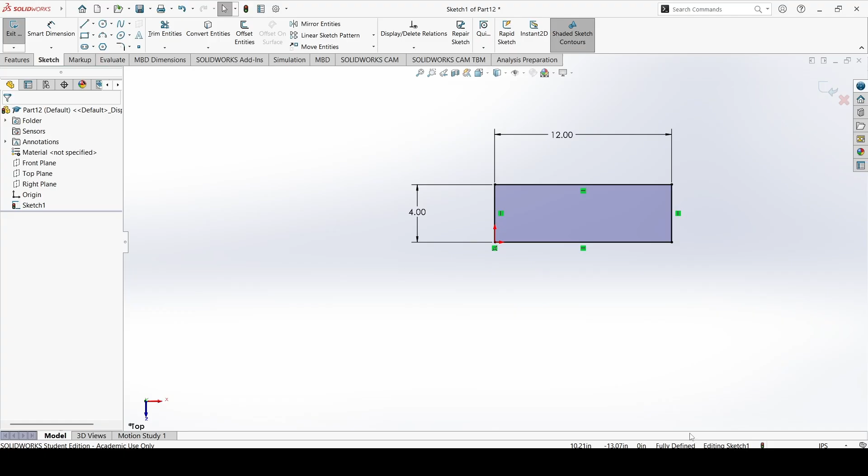And usually we don't want that. And see, it's underdefined, because you can just drag this wherever you'd like. Well, we would like it 4 inches deep, 12 inches wide. And to dimension things, you only have to click the Smart Dimension. There are different dimensioning tools here, if Smart Dimension isn't quite smart enough to select the right dimension for you, and we'll probably go over those in a little bit. So now that we have that, our sketch is fully defined, and now we can select Exit.

So we're still kind of looking down, and we can rotate by holding down the middle button of our mouse and just dragging it, the scroll wheel button. And to make this into a solid piece, well, we just select Extruded Boss/Base. I usually just call it the Extrude feature. And let's say I want this 1/2 inch thick, just like that.

A setting from when I was messing around with it earlier, there's different settings here. Blind, up to vertex, up to surface, and the rest of these. Usually you select blind. Up to vertex means you just select something and it goes up to that. Same with surface and offset from surface. Up to body, you select a body, but usually you normally just do blind. We have the check mark on that. And now we have this flat piece.

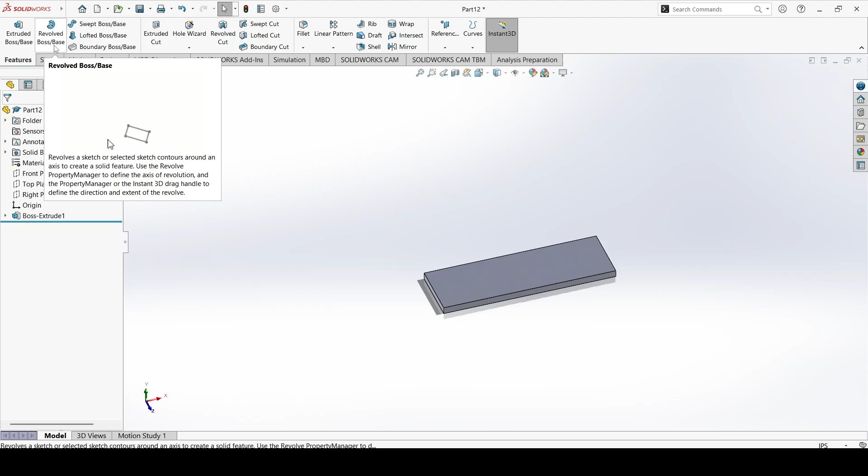Now, I'm envisioning this shelf. It has braces. It's going to have two braces because what it's going to be holding is pretty heavy. And to get these braces at about, oops, sorry, here and here, well, we need to drill those holes. And to drill those holes, essentially, we're going to want to go to Hole Wizard. And now, granted, you can go to Sketch, sketch out some points here, and I'm actually going to do that. It's very helpful to do this. You could always draw the holes with a circle, but usually I use Hole Wizard because there's a lot of options. So we're just going to select Sketch.

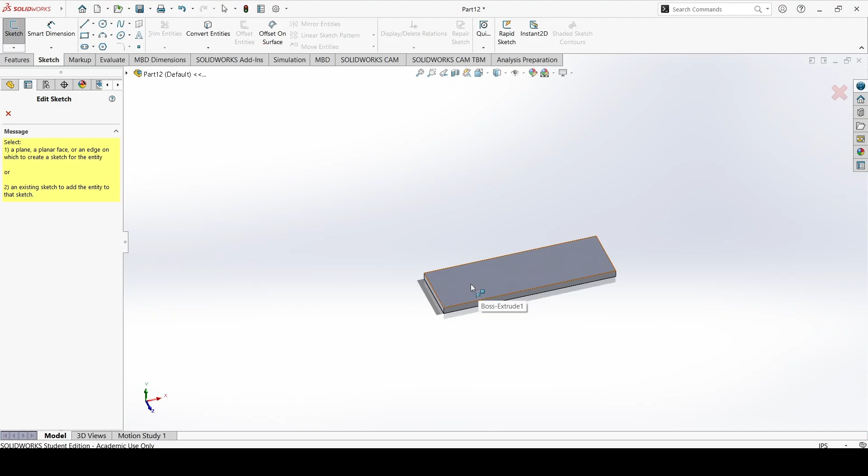We're going to go here, and keep in mind that there's also going to be a back piece here that's mounted on the bottom that's also going to be needing holes here. So we have to put our holes on this shelf here accordingly. And what you want to do is create points. And I think that these points are very useful, especially when you're using the Hole Wizard. So you can just select points on this surface and see how they're only on this surface. That's what you'd like. And say you're me and you've rotated out of your original 2D view, and say it's hard for you to understand.

You can just go up here, and there's this view orientation button, and you can just select back at the top. Now, we actually rotated. It doesn't really matter too much which side we make these offset to, where the other board goes. But in any case, we select our Smart Dimension tool, and I want these to be 1.75 inches away from each other. And we can also do the same over here.

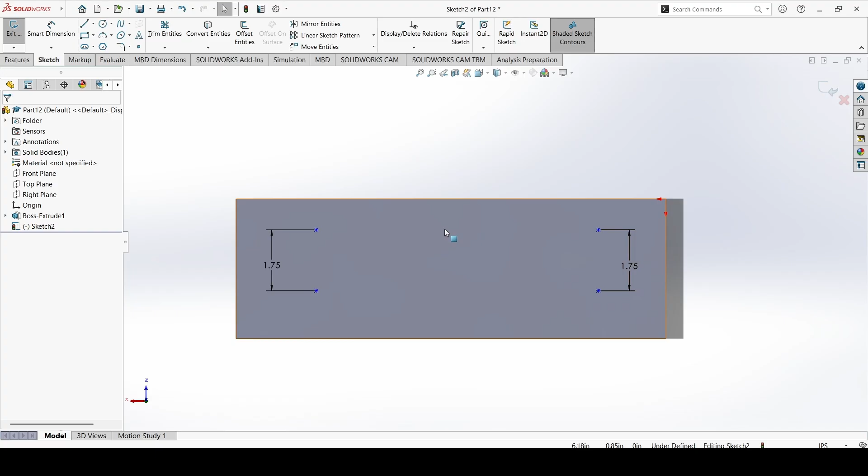With that being said, they also need to be known how far apart they are. And we actually don't need to know that because we can select on this edge over here and say I want them 2.25 inches away from the corner. Notice how these are still blue and it says undefined. That's okay because what that means is I can move this anywhere like this and I should be able to rotate that. And that is something we do not want.

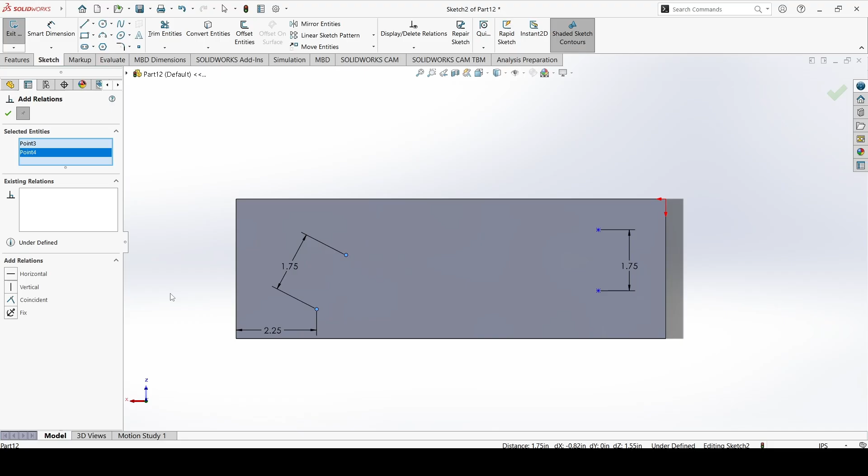To prevent that from occurring, we can go up in this top area, click on the down arrow of display/delete relations and add a relation. And it can relate to entities essentially. So after you select the 2 points, I want them to be vertical. So now as you can see, these things are always going to be vertical. So I can move it up and down, but I can't rotate it anymore.

And that's okay. Now, I'm going to say that the other board is going to be on this back side, the bottom side here. Well, I know that board is also going to be 1/2 inch thick, so I want to make these screw holes accordingly. 1/2 inch thick, let's just go with 1.25 inches. I'll just go 1.5. So, see how these are all black? I can try to drag it, and it doesn't move.

Now, these can still go everywhere. See how they're all rotating and they're just doing a lot. What I want to do is I can add relations from here to here. I can make them horizontal. See, but this one can still rotate. So I can also add relation, these two, vertical. So now they're only allowed to move left to right.

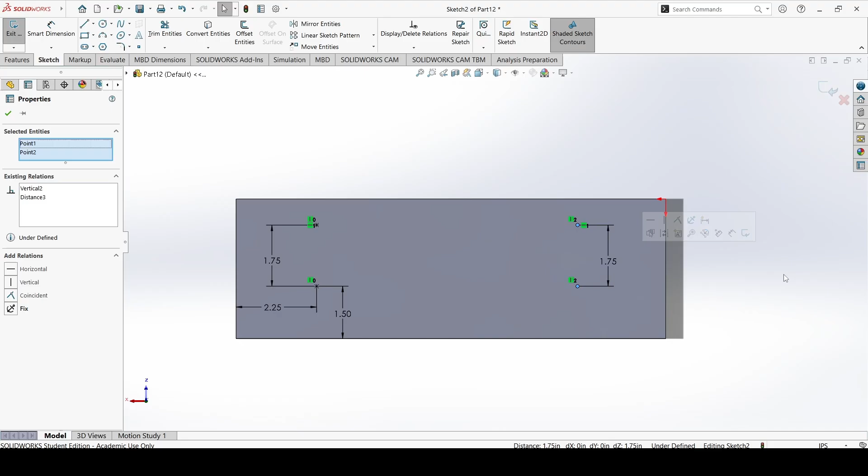And so from here, we know how much this dimension is. We can go here to here. We can actually go like this. It has a pop-up, and if we want, we can just select that dimension there, and there we go. So right now, all we've done is made 4 points. We will make two more, or maybe three, for this back side for holes we drill there.

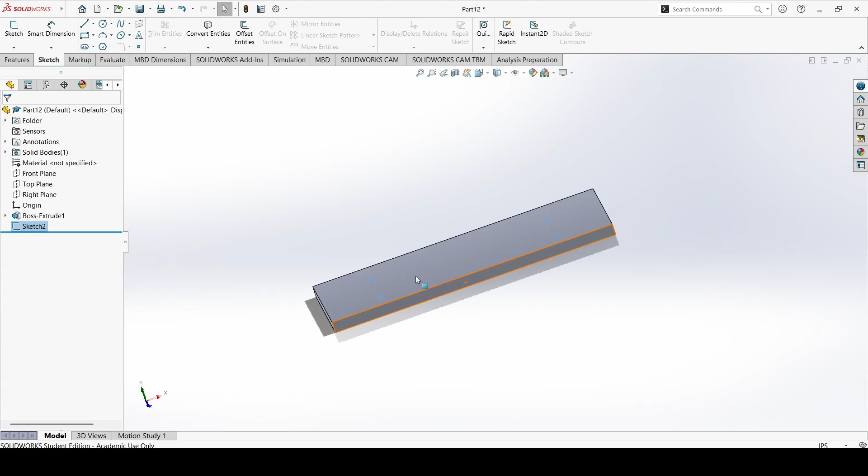But I want to exit, and now that we have these points on our shelf, we need to add the holes. So we select the hole wizard, and I want these to be countersunk screws. There's a lot of different hole types. There's counterbore, countersink, and there's just hole. There's also the tap.

Counterbore, that essentially is where the head of the bolt is a rectangle, like this. When you view it from the side, it's a rectangle, and that means it's just like a full bolt head. You can also countersink screws. You can even just straight holes. And obviously this one is going to be countersink, just because I want to. And 3/8 is going to be a little large. I'm actually going to put 1/4 inch screws in there.

And we go over here and we can select positions. Now, you can 3D sketch, not a big deal, or you can select the face that they're on. And I know the face that these holes are going to be on is this top one. So we select that. And remember those points we made earlier? It makes it incredibly easy to just select the points. And our sketch is fully defined because it knows where those holes are.

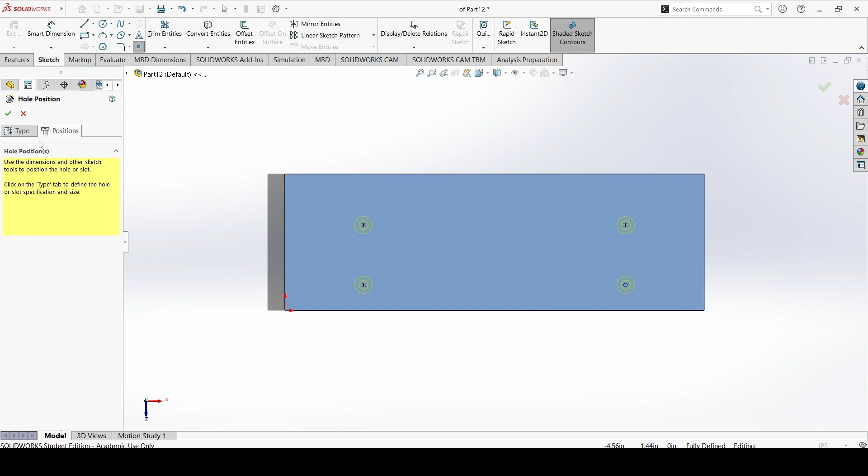So we go back and we can kind of rotate around it real quick. And we see that these 1/4 inch screws, they're there. And there's a taper here. You can't really see the taper besides from the top view. But there it is. Those are our 4 holes. We hit the check mark, and there are our holes. Perfect.

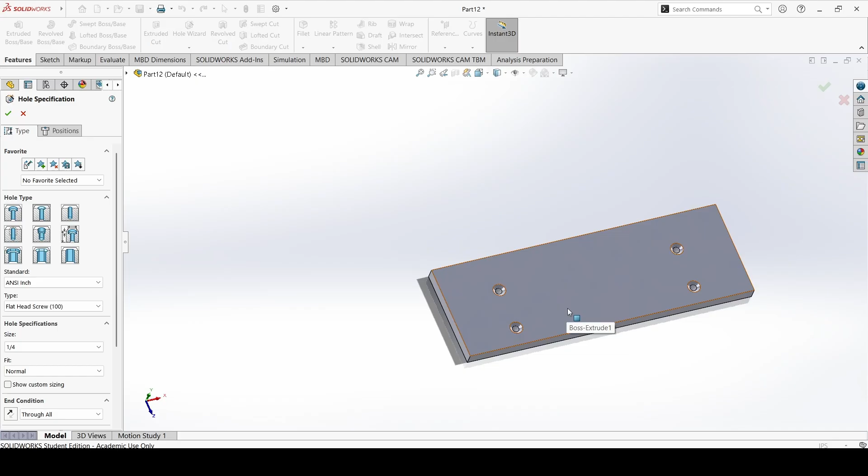We're going to do the same thing for this back row. And once again, we can just select the sketch, but instead this time I'm going to show how you can do it just on the hole wizard. I find creating a whole other sketch and adding points is much easier, but it's up to personal preference. So we're going to select the surface, and now I'm just going to put three of them back here.

Now, see how it says underdefined? These are defined, but these aren't. I would like this to be 0. Well, 0.25 because the board's going to be half an inch thick. And as you can see, this top little bit here, it's not doing too hot. See, it kind of clips outside, and that's not something we want. So I'm going to continue dimensioning these, but we're going to change the size of the bolt or the screw.

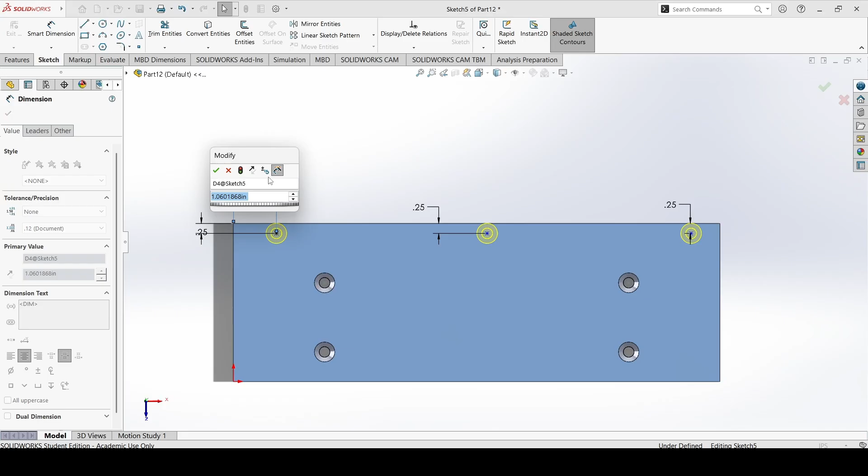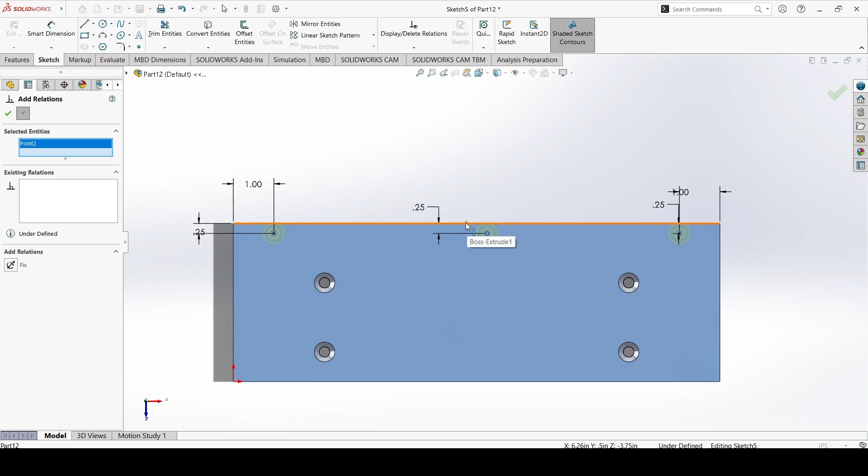Notice how I could have made all of these with a relation straight across, but I didn't. I'm going to select that and I want it to be an inch away. Same with this thing, 1 inch, and this one. This one's interesting because usually you'd want it in the middle, so I'm going to select this point and add a relation from this, usually with another point you'd be able to select the midpoint there, but unfortunately I'm unable.

So what you could do is add a center line, and a center line means it's going to be dashed. If you look really close, there's little dashes. I'm just going to make this line from here to here, not a big deal. Notice how this thing can still move left to right. Now I can add a relation to this, add relation, vertical. Now we have a fully defined sketch along with all of our holes.

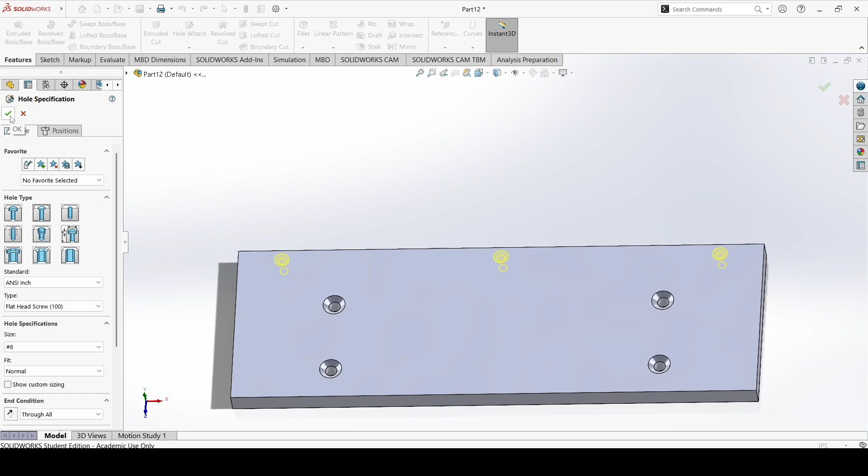Like we said before, I would like to change that type of bolt or screw, and all we have to do is go back and select a different size. Unfortunately it appears the lowest standard size is a quarter inch, but we can just select a smaller size. There's different types of fits, say I just used a size 8. That's just the size - you can order screws from McMaster Carr in any different size, but that's not the point. The point is you can select any screw size, and at least for this project, you can.

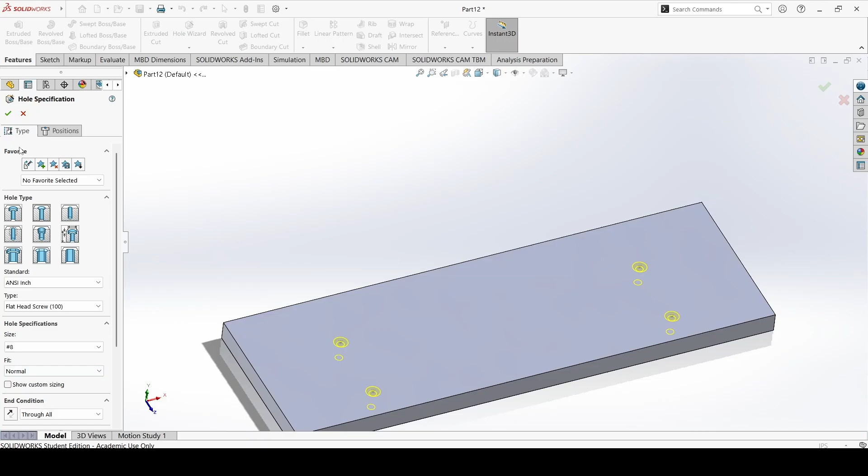So now that we have that, let's change the other ones to size 8 as well. How I did that is you select the feature they're on, right click it, and as you can see, you can edit the feature. We just want size 8, check. And there is our entire piece made.

Now our material is not specified, and just to specify a material, we can go to edit material. SolidWorks has a lot of different materials built in, and you can make your own custom materials as well. This specific piece, I would like to make it out of plastic per se, and ABS or ABS PC. ABS PC seems a little bit stronger.

You can make it out of nylon and all this other different stuff. Usually most of our parts on the Baja team are made out of metal, but let's use ABS PC. There's all these different properties on here, and usually you'd like most of them filled out. Compressive and yield strength might hold - they might have a little bit more difficulties later on, but we're going to find out once we finally get to putting it all together.

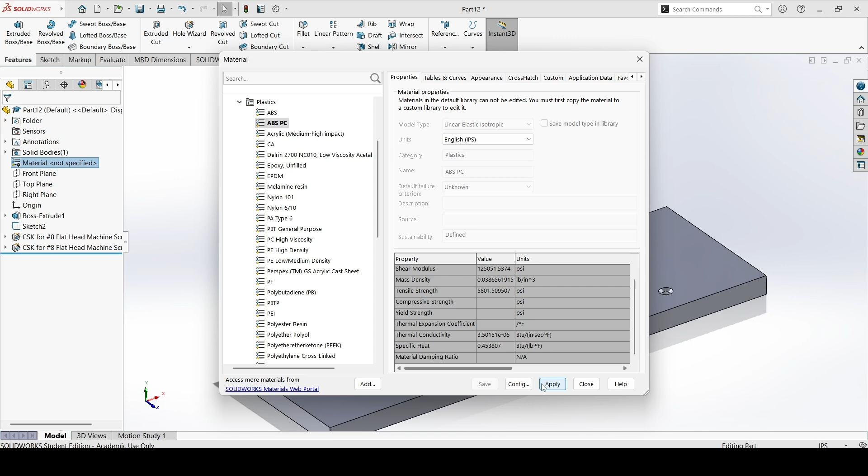So we're going to click apply, close. As you can see, now our piece is a little bit transparent, and that's okay because you just change it right back.

So now what we need to do is save our part. We hit save, and I already have a folder, full project walkthrough of the shelf, and we're just going to label this shelf top. There is a specific naming system that each year kind of has - pay attention to that as you're naming your parts. I'm just doing shelf top, so it's easy for me to remember, and it's not on the file server. We're going to hit save.

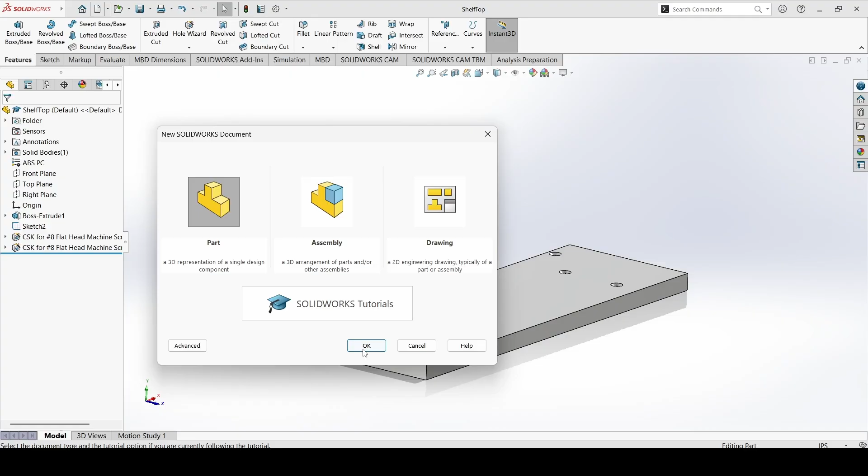Now that we have this, there's a few more parts we need to make, but we're going to leave this open. We can select, once again, up here in the top left, New, Part, hit OK. We have a new part. Now, once again, we can start with a sketch. Last time we selected the top plane, and we can do the same thing, or we can make it easier on ourselves and hit the front plane.

Now, this backing of the shelf is what gets mounted to the wall. So once again, we're going to select our corner rectangle - this goes on the back of it. And we can select Smart Dimension, and we want it to be the same width, so we'll go 12 inches. For height, notice how there was - I'm going to make this kind of like a rectangular prism, but two of the sides are the same.

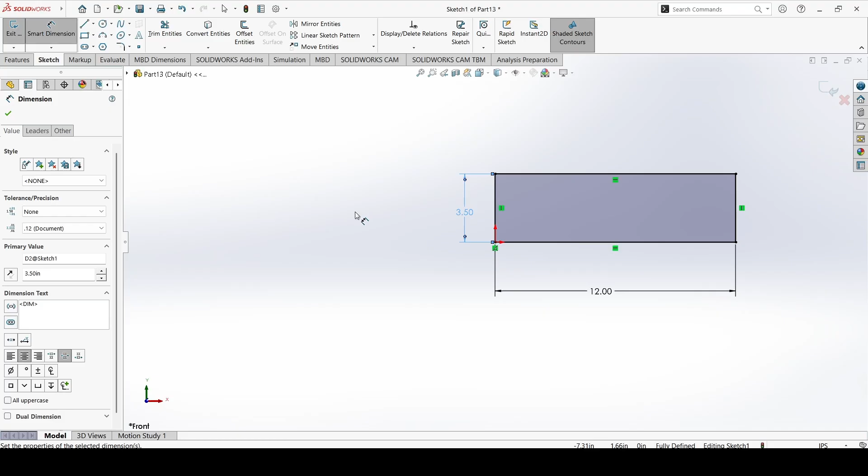So we know that the other one was 4 inches, minus the half an inch of board, or in this case plastic. We select enter, and it will do the math for you. You can do very complicated math, like 3.5 to the power of 2, say you need that for some reason, and it would do it. But we know it's 3.5.

We'll hit enter, and we'll go from there. We'll hit the check mark. Once again, we'll select exit, and we will extrude it once again. And this time, let's go with the same thickness, 0.5.

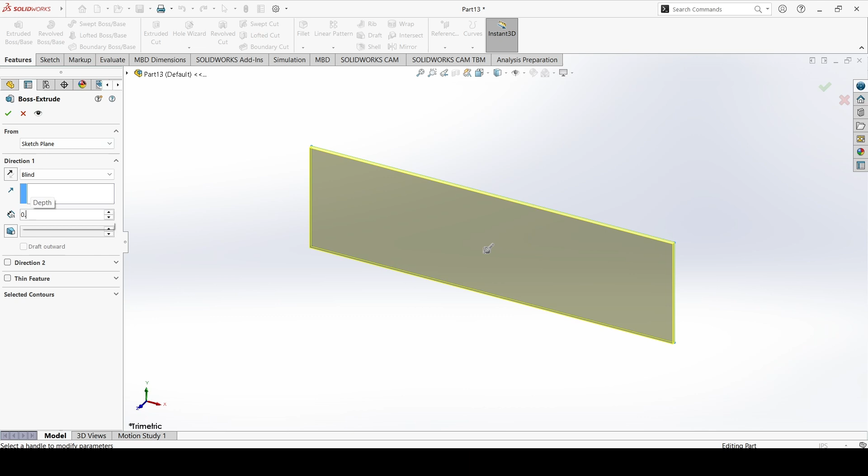All right, we have our board, and now we have two sets of holes to drill. One is going to be on this face, and the other is going to be on this face. The ones on this face, there's going to be braces here and here at our dimensions. And on this one, there's going to be the holes drilled down.

Now, what we can do is we'll go sketch, we'll go here, we'll put down 3 points. We will dimension them. We know this one was an inch away. We know this one was an inch away. And we know this one was a center line.

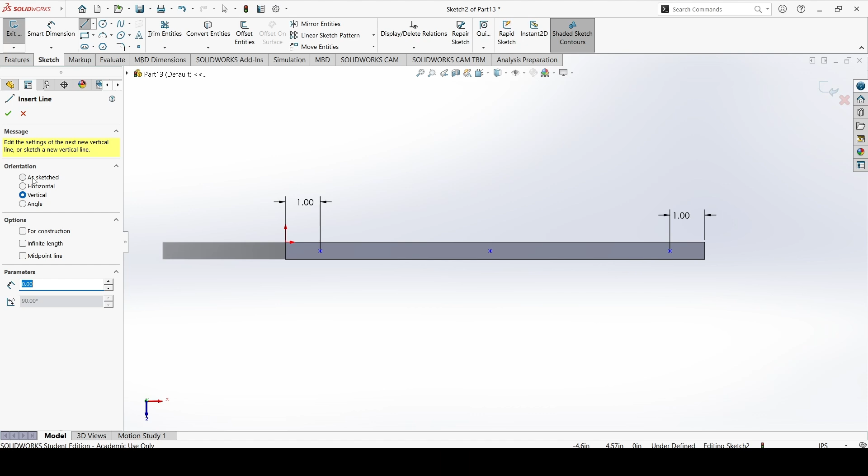And see, we can add lines, and there's a whole bunch of orientations. This one I want to be specifically vertical, but we'll do it as sketched so we can add our relation later. So we need that midpoint, which is right there. Select this, add relation, make it vertical, boom.

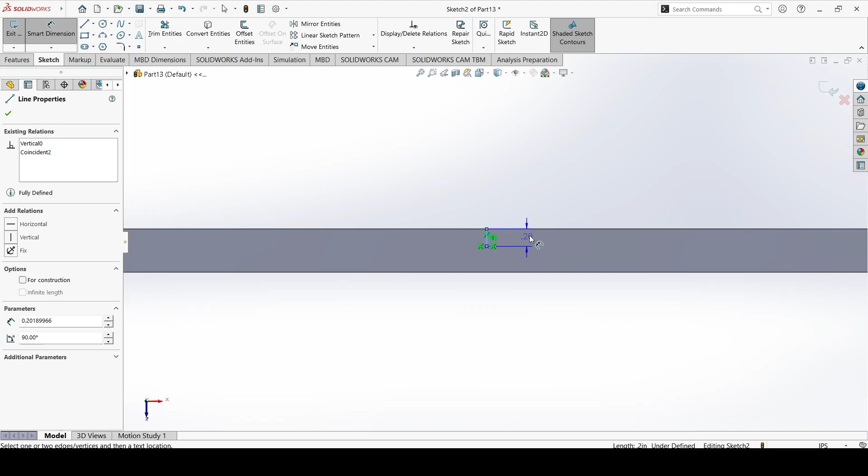And so this thing can still move up and down, so we need to dimension the length of that, which is 0.25. So that one is all black, which means it's all locked down, and these two are not.

So instead of adding dimensions to those, we can add relations, and instead of adding more dimensions, they're all related. And sometimes this is good, and sometimes this is bad. If you'd like to keep all of these in line, no matter what the distance is away, add relations.

But if you want to have them different distances, possibly, later in your design, do not. So notice how I, for some reason, exited my sketch. To get back into it, we just right-click the sketch and hit Edit Sketch. Very simple. So this one, I'll just show that it does the same thing.

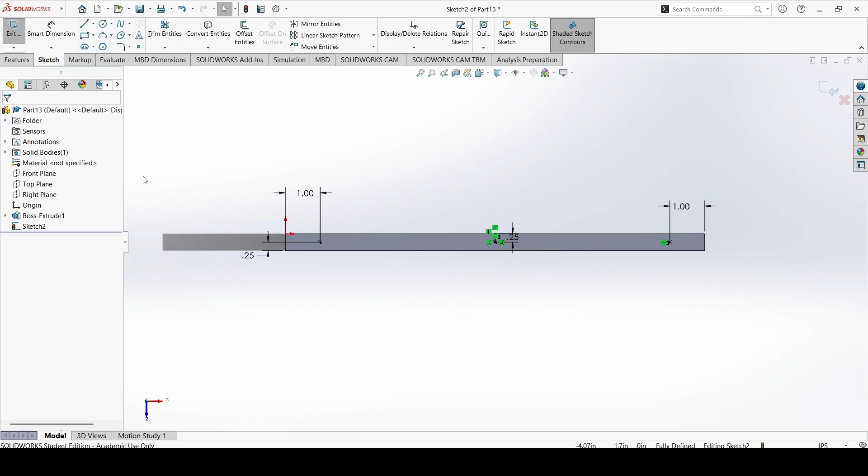Everything's black, fully defined, we're good. Now, we're going to add a feature. We're going to go to Hole Wizard. There are more options here, but Hole Wizard is the most common one. Hole Wizard, we're already on size 8.

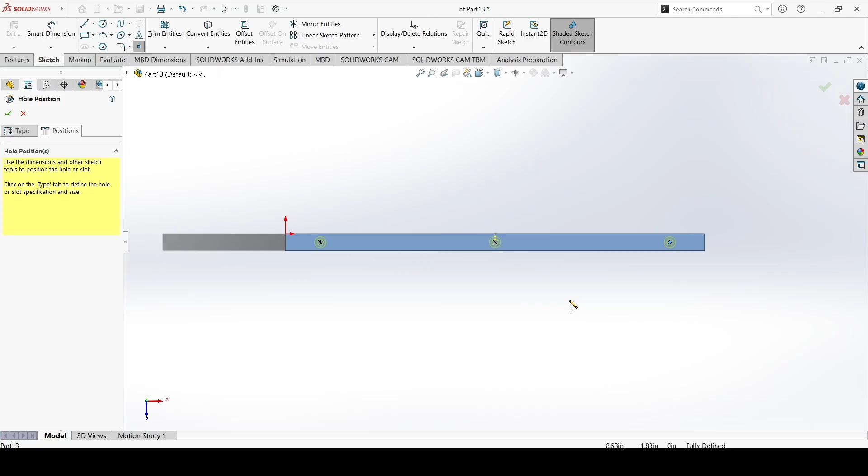We go to Positions, we select our surface, and all we got to do is do that. And notice how it went all the way through. We're going to change some of those settings. But also notice these are tapered too. You do not want that.

So what we're instead going to do is we're going to select Hole, Size 8. And look, instead of having the taper, it just has a hole. And so this is usually how holes are made. You don't have two countersinks with only one technically being used, if that makes sense.

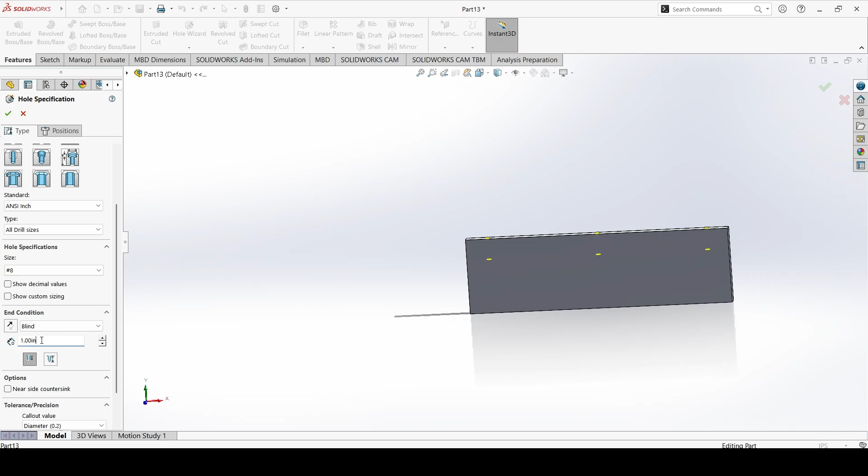So what we're going to do is we're going to select our end condition to be blind, and I want these to go an inch in. I lied, I want them to go half an inch in. So that's how that works.

Hit the check, and boom, right there. And this sketch, it kind of looks a little weird because I have that line in there. And if you don't want that to be showing, you can just select hide on that sketch and it'll be gone.

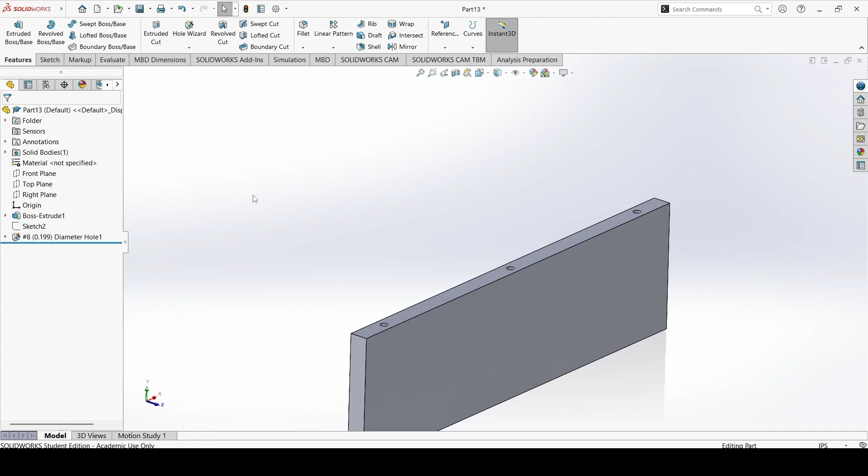Now it's time to have more. And by more, I mean we're going to create holes in this. And so I'm thinking that since this is the back, we're going to have holes all the way through it. Which means... we're not going to have, okay, we are not going to have holes all the way through it.

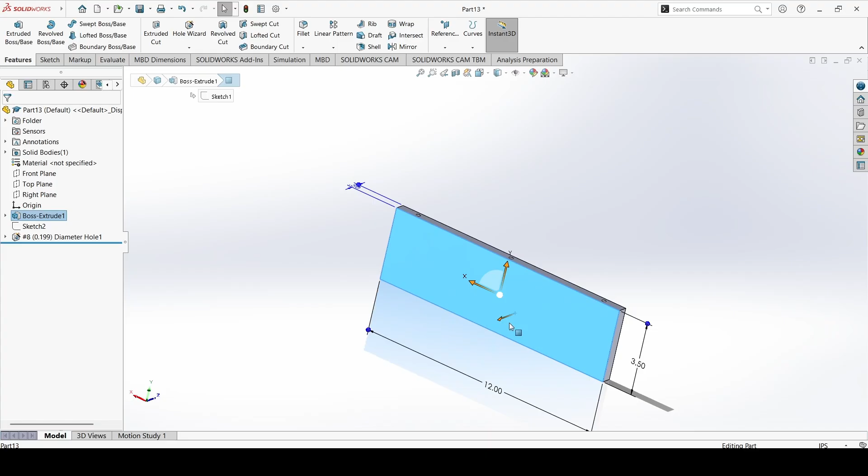Whenever we do the design or the FEA, finite element analysis, this entire back, we're going to act like it's glued to the wall. So simply what we're going to do is on this back side, we're going to be creating more countersunk screws that go this way, that go into the braces. So sketch.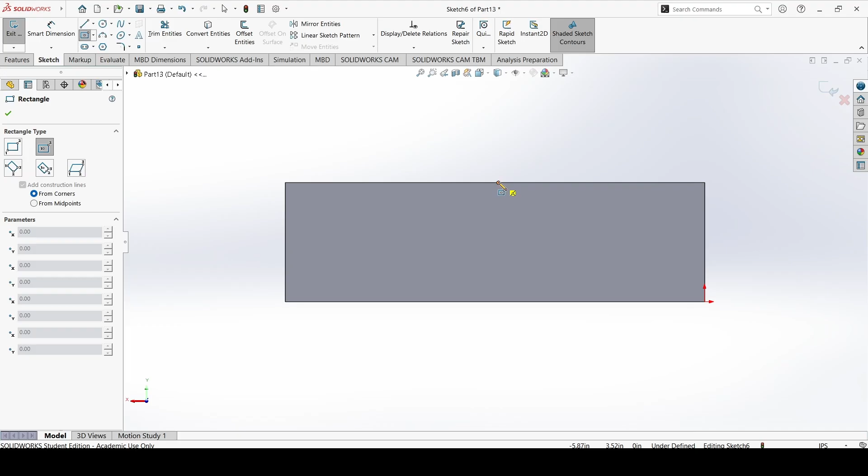This time I actually want to create a center rectangle just to show you guys the different tools. We're just going to draw it out like this. See how it reaches both edges at the same time? That means it's in the middle, but not in the middle vertically. So I'm just going to do that, and we're going to select 4 points. 1, 2, 3, 4. We just created 4 more points.

Now if we go back to our other design, we know that these - hold on, sometimes you have to go into where they're at. Oh, we made them on this one. Okay, we're just going to make it how I feel.

We can add more relations, but before that I need to create the center point here and the center point there. So add relation between this one and this one - they're always vertical. Between the center point of the rectangle and that point, add a relation - they're always horizontal.

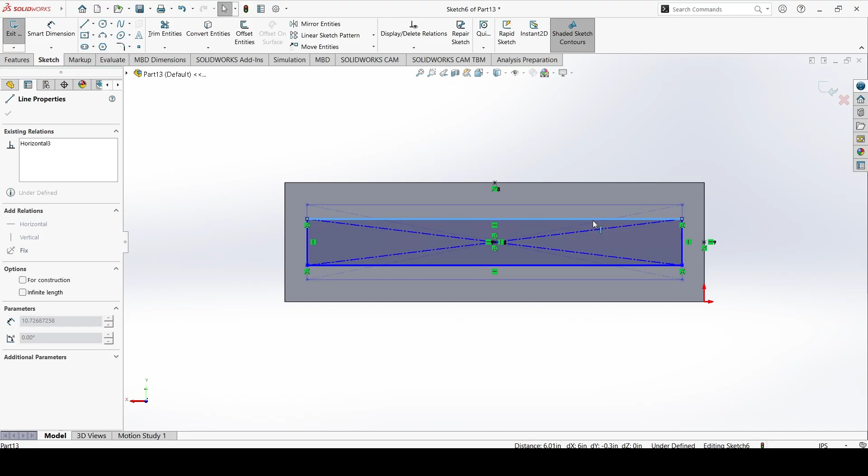That's if we want the pattern to be in the middle, and I think I will have it in the middle this time. These screws will probably be a little bit closer together, like that. We'll go 1.5. And how far across they are, let's go 10.

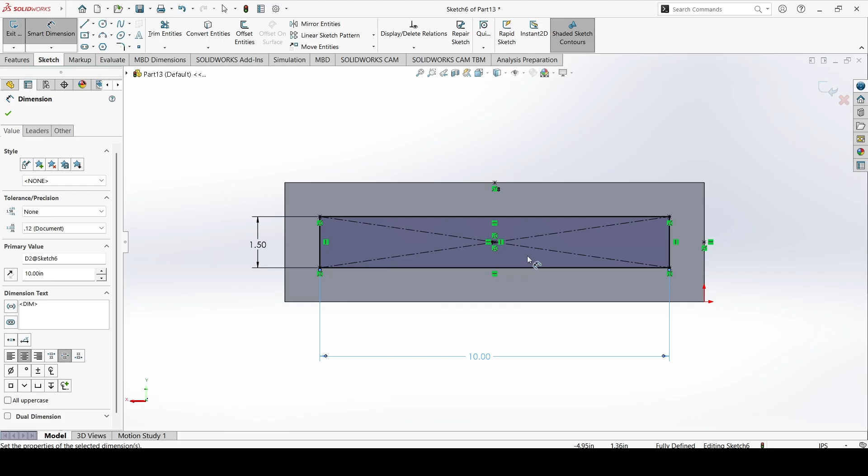So keep in mind that the board, the braces, they're going to be in the middle of this. Makes sense? These holes are going to define them. So we can just hit check, and our sketch is fully defined. This is where I want the holes.

We'll have to exit. We can go back to features, hole wizard. And this time we want countersunk screws, positions, select the surface. All we got to do is select those 4 points, hit check, and then we're good. So I'm going to hide that sketch.

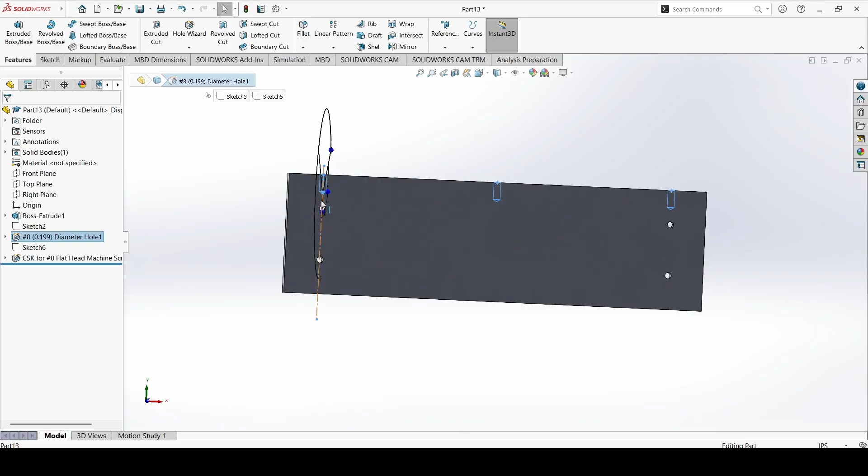So as you can see now, these two won't be an issue. At least we will find out if they're an issue, but they shouldn't be. We have our plate here.

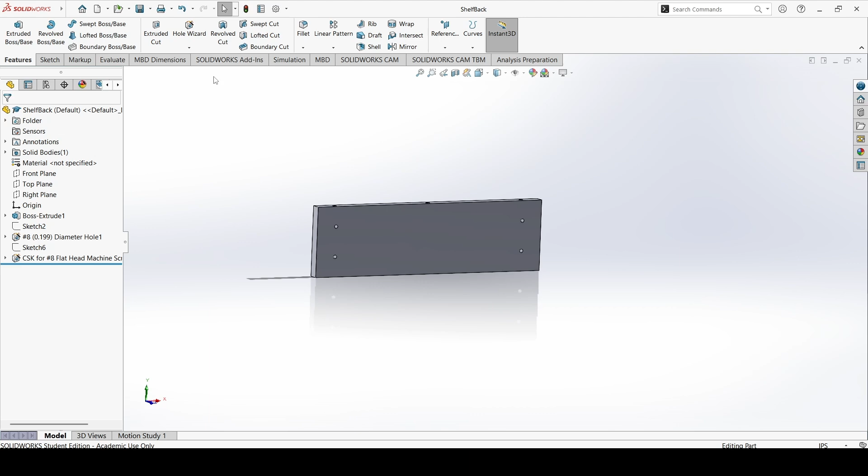Now we need to make the bracing. So once again, we're going to save this part. Instead of shelf top, we'll go shelf back, enter, and we need one new piece that we'll just duplicate twice. We're going to make an assembly and do it from there. We're going to make a sketch.

Our front plane was used for the back, our top plane was used for the top, and to stay with the same type of coordinate system, you could say I'm going to select right plane. And I'm going to make these triangular supports. One, two, three.

Now these supports are going to be fully covering - they're going to go to the ends of the board. Okay, so we know that our top board is 4 inches. We have half an inch being taken up on the bottom by the other board.

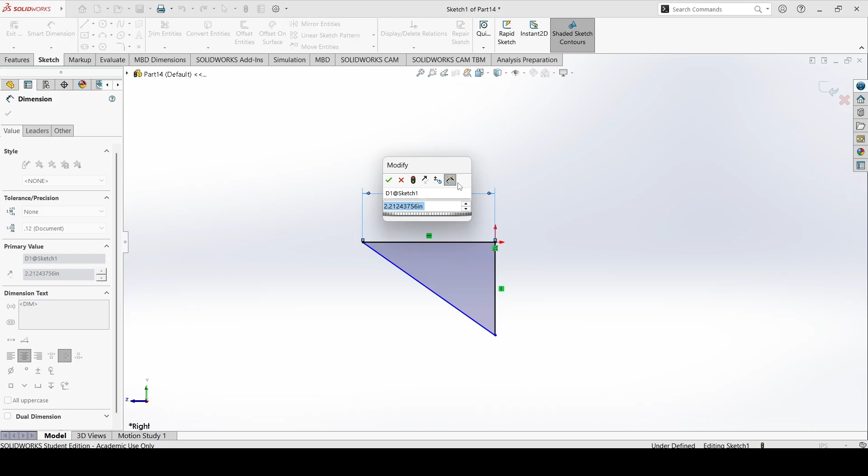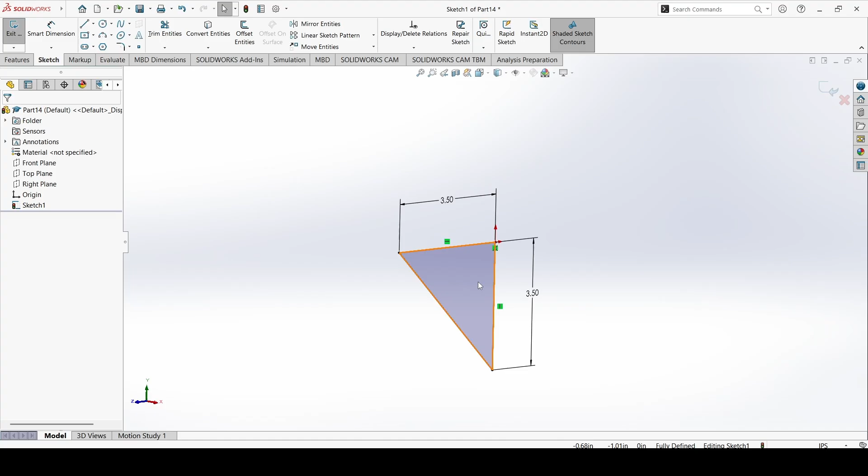So that's 3.5. On this one, we have the board that is 3.5 inches tall and not being taken up by another board, so it's another 3.5. So this sketch is fully defined. This is what our brace is going to look like on the side. Exit. On our features, we're going to extrude it, and we know we want it to be half an inch, just like everything else we've made.

Now here comes the slightly tricky part, getting the measurements on here. So we'll start with the top. I would like to show you the evaluate tool - you'll use this a lot on the Baja team. You go into evaluate, you can select measure. After you select measure, there's different units and just different distances there. Usually you leave it the same unless there's something specific.

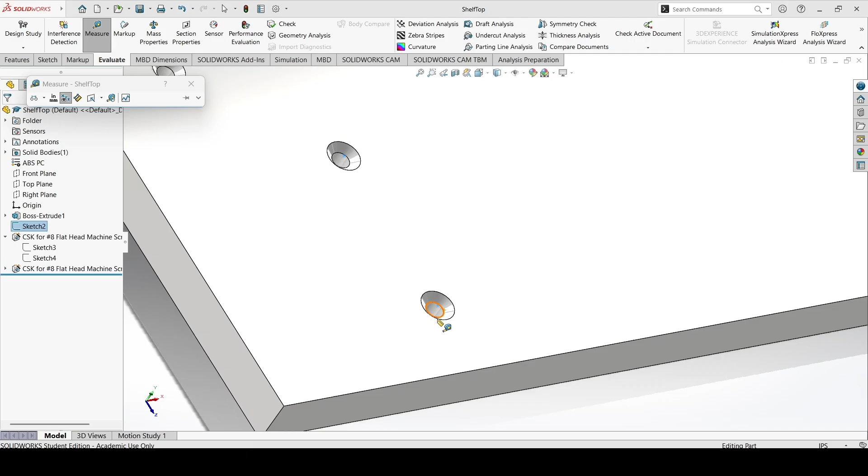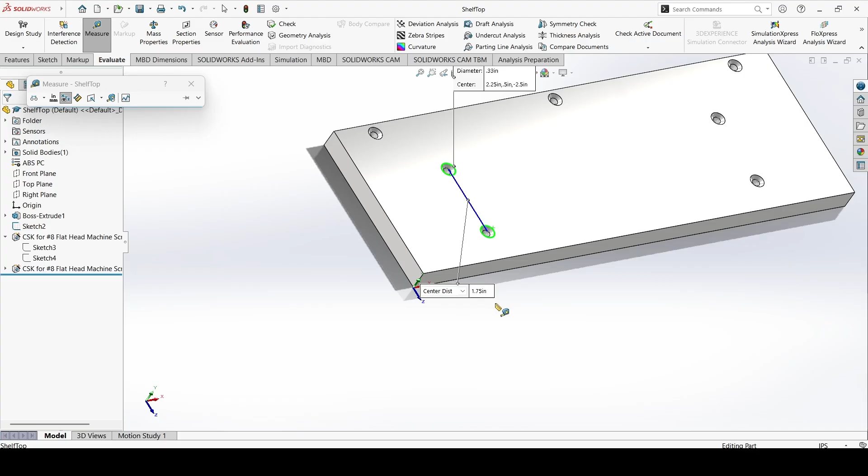But what I'd like to do is select this circle and this right there. Notice how it says center distance is 0.75 - so it means from the end, it's going to be 0.75. And then from this circle to this circle, it's 1.75. So that's good. So now hit X.

We'll go here, and so this is our top. We can go to features, hole wizard. We want just the hole, positions, select this top one. Now put 2 holes down. We know that the first hole is 3/4 of an inch away, and we know that this hole is 1.75 inches away from that as well.

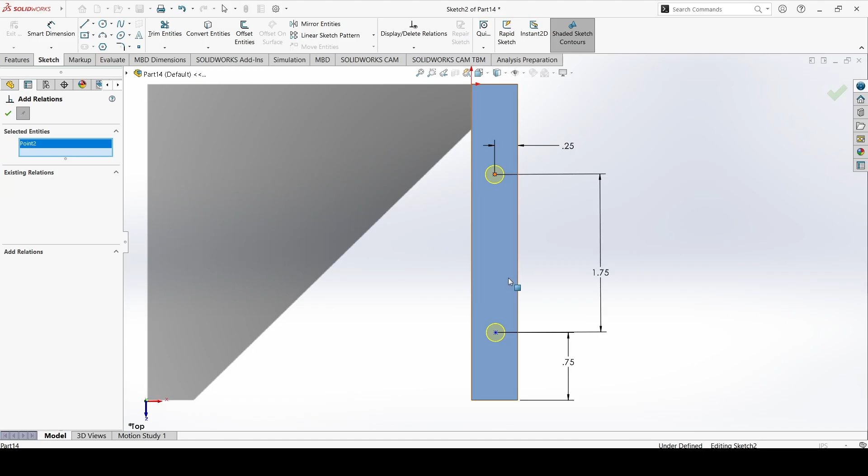So how are we going to align these with the center? Well, all we have to do is select that. From the edge, we know it's going to be halfway, 0.25. And it's not all black yet, so what we're going to do is add a relation - these two are going to be vertical with each other. Check - they don't move anymore. We can hit good, and there we're good.

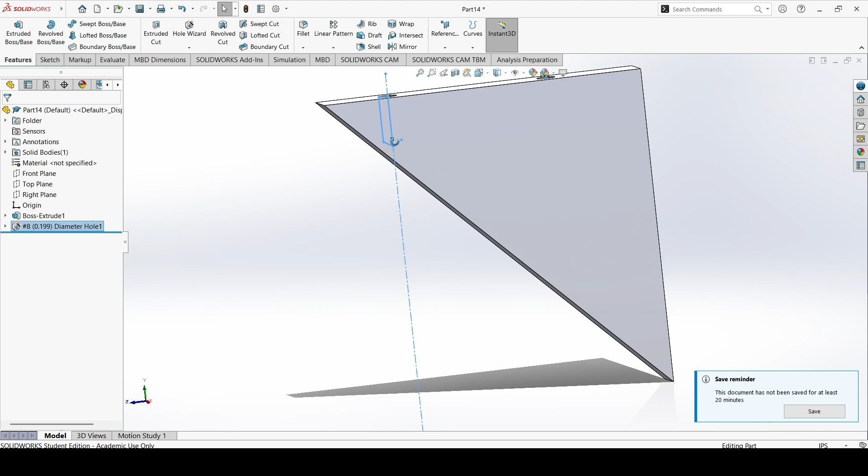So this hole goes down half an inch, and I think this should be fine for now. And we will know in the FEA because it'll tell us whether this hole is down too far or if this starts bending a little too much.

So now we need the back side, and we can do the same thing. Shelf back, go over here, evaluate, measure. From the bottom to here is an inch, and from that inch to the other hole is an inch and a half. Exit out, go here. And this time I'll just do the same thing. I won't make an entire other sketch.

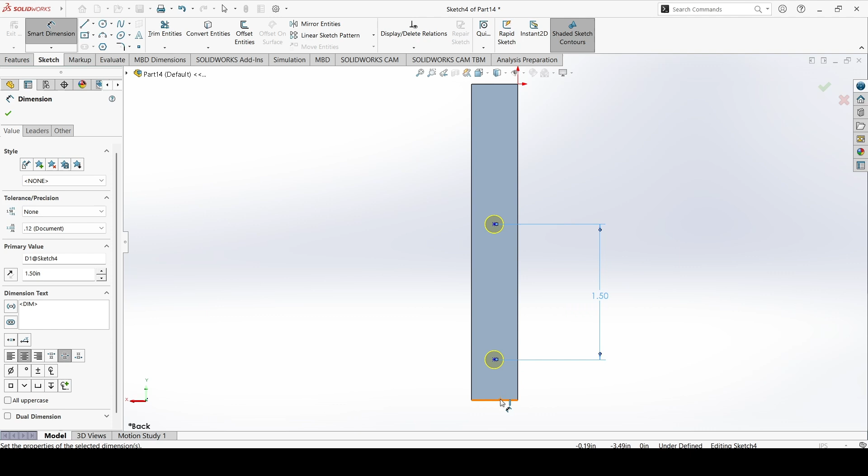Let's go straight to the hole wizard, positions, and points. One there, and one there. Remember this was an inch and a half. I believe this was an inch. That looks about right because there should be an inch on the top here. Okay. And now they need to be in the middle.

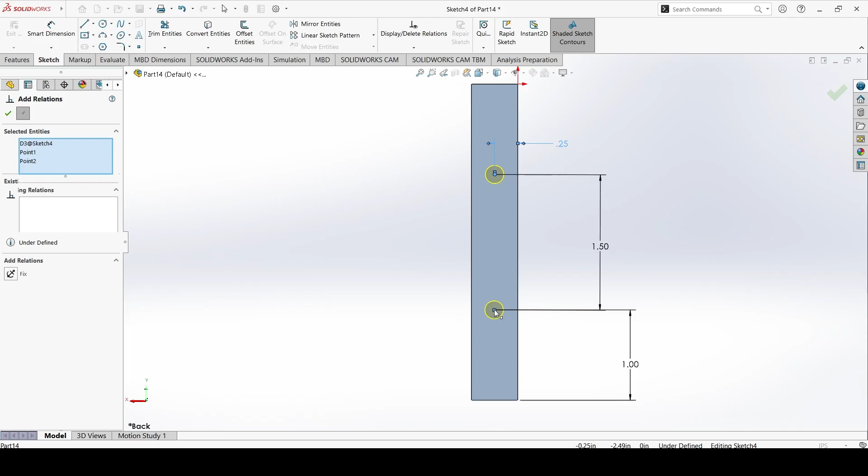So easy enough. 0.25, enter, add a relation, vertical. Fully defined, as it says in the bottom right. Hit the check mark, and there we go. This piece is now done. Once again, we can change the material. We can just edit material. And I forgot what I selected on the other one, so we can just go ahead and check that.

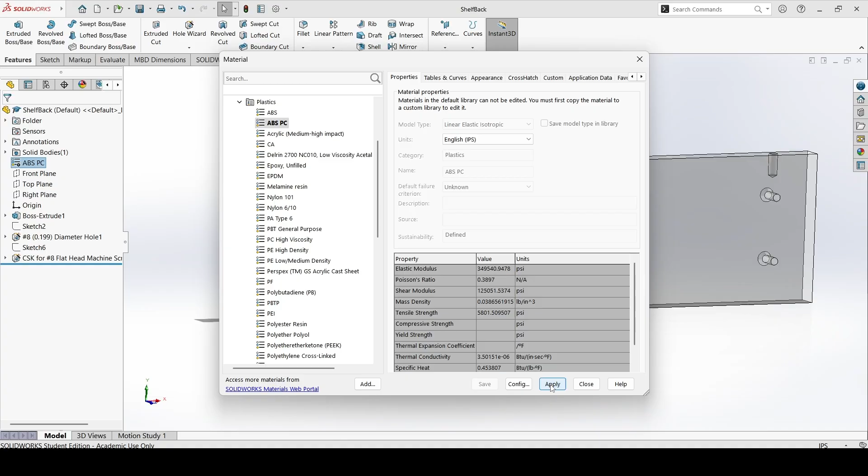And I will go ABS PC. So, did I do that on the shelf back? I did not. So I go here, edit material, plastics, ABS PC, apply. And it does make it transparent. That's okay. It doesn't technically do anything. You can always change the transparency later.

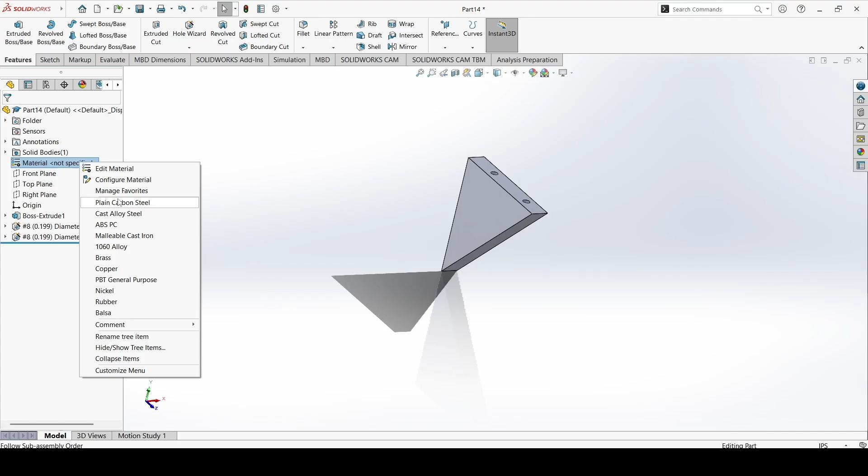And a little quicker trick is if you right click, these are your favorites. And you can change your favorites in the program itself. You select ABS PC and go from there. So now that we have that, I would like to save this part and then we'll go shelf support. Enter, and there we go.

Now it is time to assemble this all together. We're going to hit new. And since we can make assembly from part or assembly, it says I'm running low on memory. So what I'm going to do is I'm going to close out my current SolidWorks tabs, and we're just going to create an assembly separately. New, assembly, we're going to hit OK, and it pulls up our files.

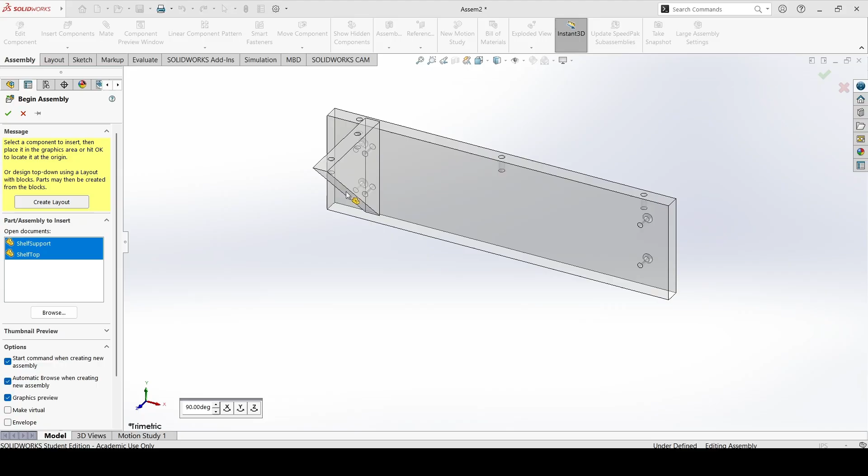So in your files, you should be able to select all of these. Hit open. In this case, I would like this piece, the backing piece, to be fixed. So if I just select that, put that out there too, and this, we should be good. So I don't want the transparency to be changed. As you can see here, if you right click on it, you can change transparency. And I want them all to be solid.

So what we can do now is this component is fixed. The first component you place is usually fixed. And that'll happen in assembly. So you'll be like, oh, this component's fixed, and you'll try to fix it with a whole bunch of mates. Sometimes you just don't even want to try. So this is fixed. That's fine. To put this all together, though, are mates.

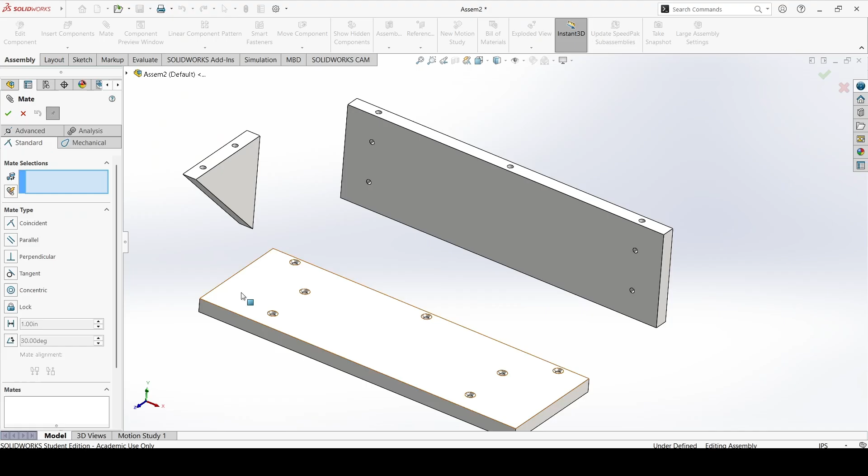You select a mate, and I'd like to put this bottom brace on first. So if I select this hole and this hole, because those two line up, they're spaced apart, but it looks like it's almost centered, and it is. So it's kind of concentric to that hole. Okay? So usually your mates are pretty self-explanatory. So if I select this and this, they're concentric. And what concentric does is it just lines up the middles of the circles.

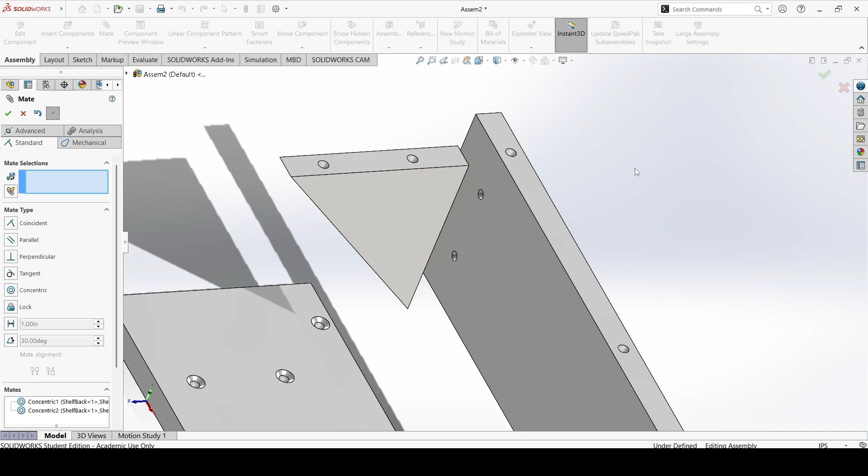But notice how I can still move it in and out. We don't want that. We know that this face would usually be pressed up against that face. And so coincident, that's what it does. It means they touch. You don't want perpendicular, or you could technically have parallel, but since you have these concentric holes, it works just like this. So you just hit the check mark. And now, if we X out of the mates, it's fully defined. This component is fully defined.

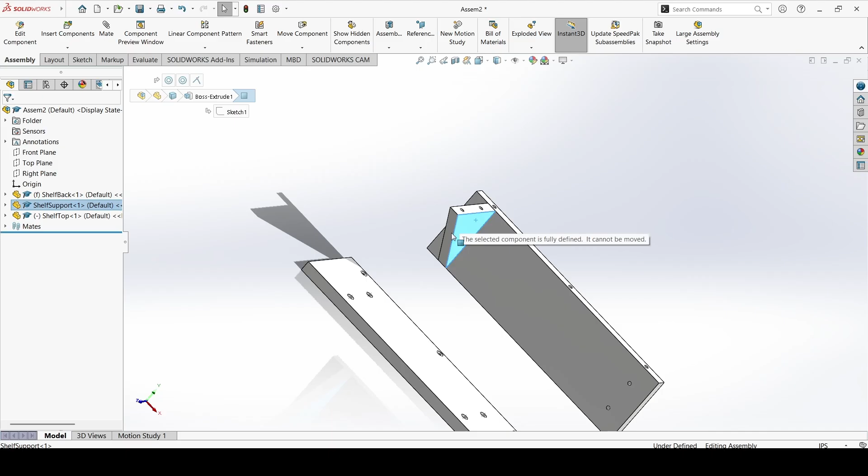Oh, it looks like we didn't make the holes right. We can go back and switch that. All right. So what I'm also going to want to do is select mate again. And we'll go at the bottom of that hole, not to that. So if we select the wrong thing, we can just select it over the mate selections, hit delete, go back over. We should be able to select a new one. Okay, sometimes it messes up. So mate, middle of that circle, middle of that circle, go for it. Just drag that up.

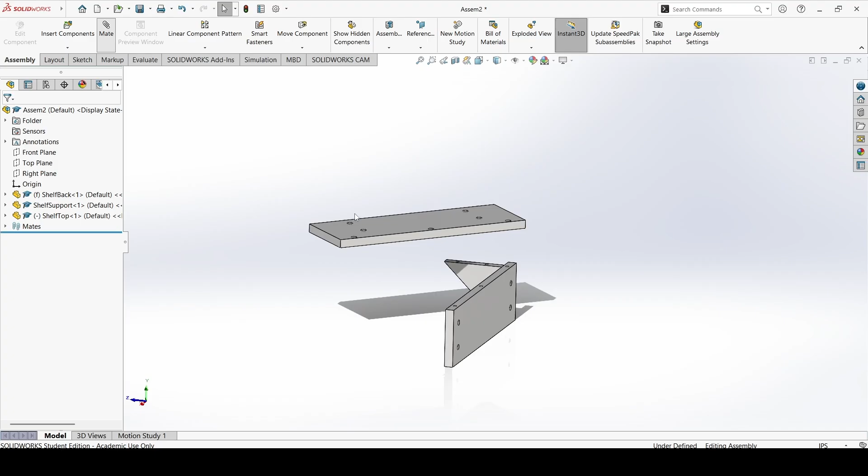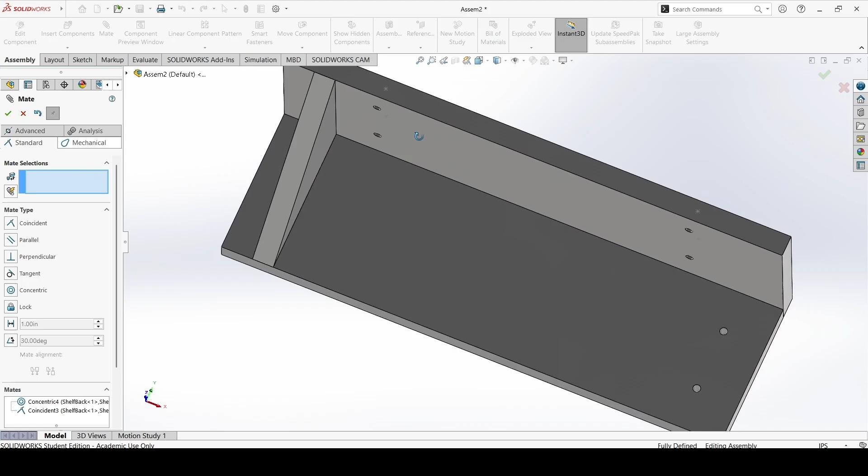And when you're doing an assembly, you're putting everything together the way you would in real life. So like that. So you'd line those two holes up, and then you'd bring this entire piece down, just like that. So as you can see, our holes aren't lined up here. And that's a little problem, isn't it? So what we're going to do is evaluate it real quick with our measure tool, and we know that those holes need to be an inch away from the edge.

Okay, so something interesting you can do in SolidWorks and many other programs actually is open part in position, and you can edit a whole bunch of things. So you can edit the part. It says we have to save it first. That's okay. We'll just put shelf assembly. I probably spelled that wrong.

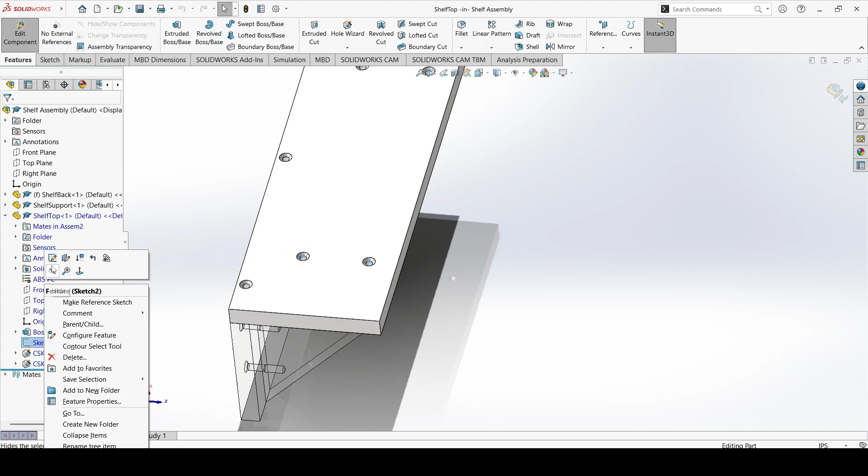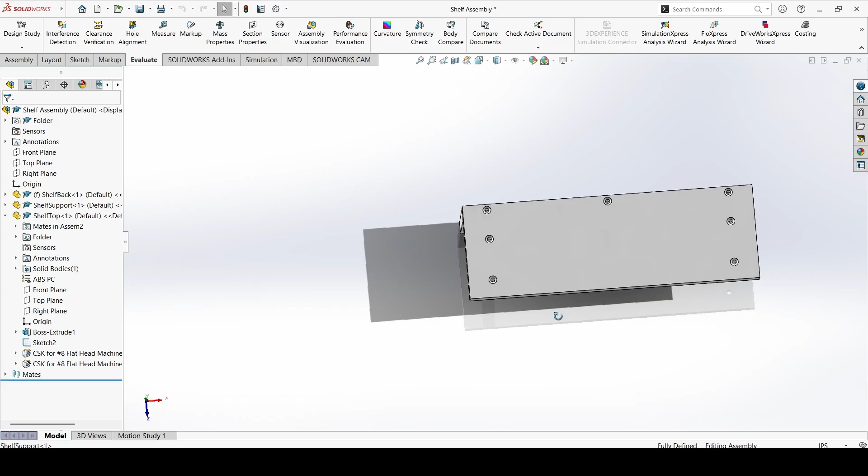What it'll do, it'll allow us to edit the component, and we want these holes to move. Well, lucky for us, we can edit our sketch, and we know this needs to be an inch away, and we know that this needs to be an inch away. Hit the check mark. We can exit sketch, and we can exit editing the component, and now everything's fine. So if you look close, that hole goes all the way through, and that's exactly what we want. And that's why I usually do sketches like that, because they're super easy to change without having to go in anything super deep. And so we need another shelf support, don't we? Because there's another one over here.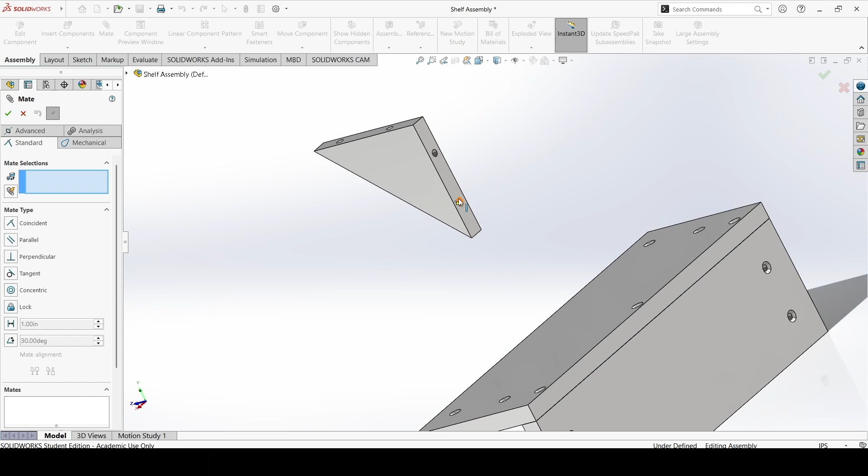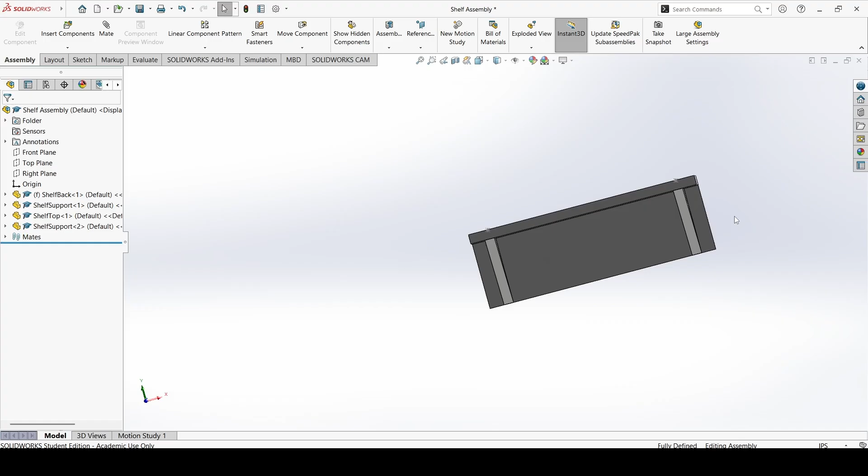So we can copy with mates, and usually I don't do this because sometimes it all gets a little bit screwy. So I'll just select a component, Control C, Control V. Pops out of thin air, of course, because that's how it works. And we'll go to mate. Once again, we'll go that to this, hit the check mark. And to make it easier on us, we'll go this to this. And that should lock us completely in. We have a fully defined assembly.

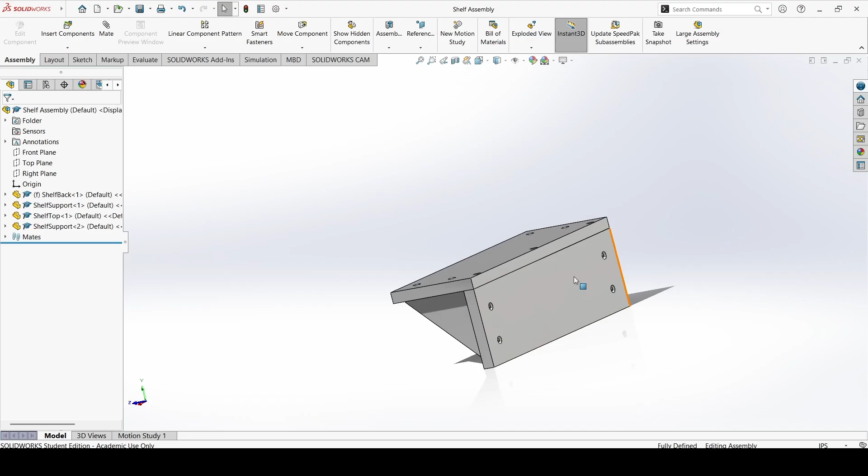This is what it looks like. Lots of screws, lots of awesomeness, and we're going to have a weight pushing down on this. And so real quick, I just want to save that. Save them all. Now that we have this, so what exactly happens here? Well, earlier I technically forgot to add a little circle in here, which is where our pressure was going to be applied. But instead, I'm just going to act like a big old foot is stepping on this whenever we evaluate. So that's how you assemble an entire assembly, essentially. So this is against the wall. We're going to act like this is just glued straight to the wall and nothing's going to move or anything like that. I could have put screw holes in here, but I'm not doing that.

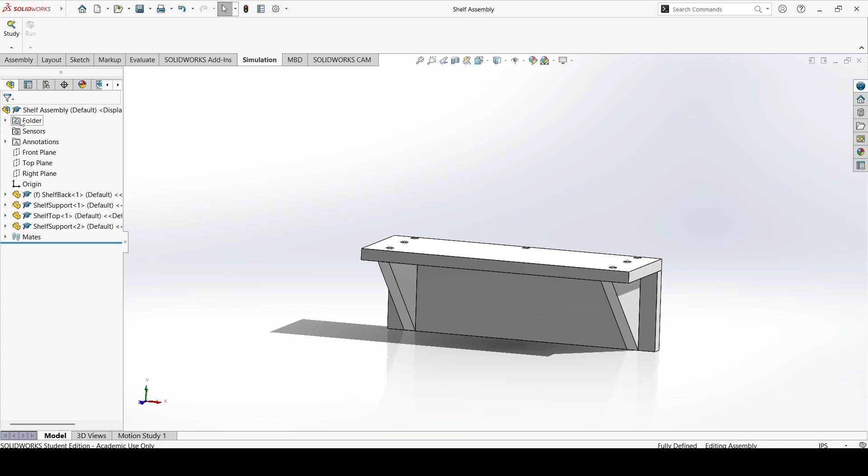To start simulating, go to the simulation tab. And we should have materials for all of these so far. We're going to select study, and it's going to open up all this fun stuff. We'll name it shelf study. And usually static is what you'll use at the beginning level. There are many different types. So right now I'm working on learning more design and topology. There's a lot of different other simulations. But for this one, let's use static. We'll hit the check mark and we'll go from there.

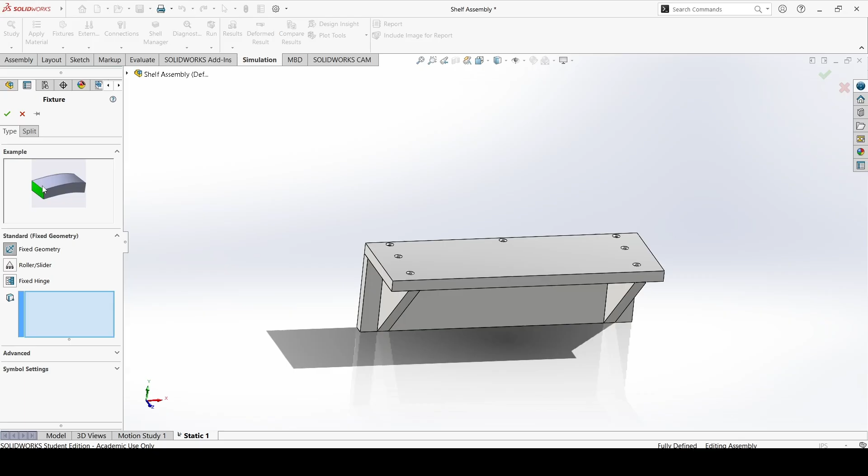So it appears that this thing has some weird transparency again. But anyways, we're going to first add a fixture. And a fixture just affixes something. And as we can see, fixed geometry. It has a little example actually, kind of like bending a beam, one end is supported, the other isn't. So in this case, this beam, this part, and we'll go with this part, is supported.

With the check mark. So those green things of awesomeness, arrows and vectors and stuff like that, those tell us that that part doesn't move. And so everything else is fully defined. Here's our external loads advisor.

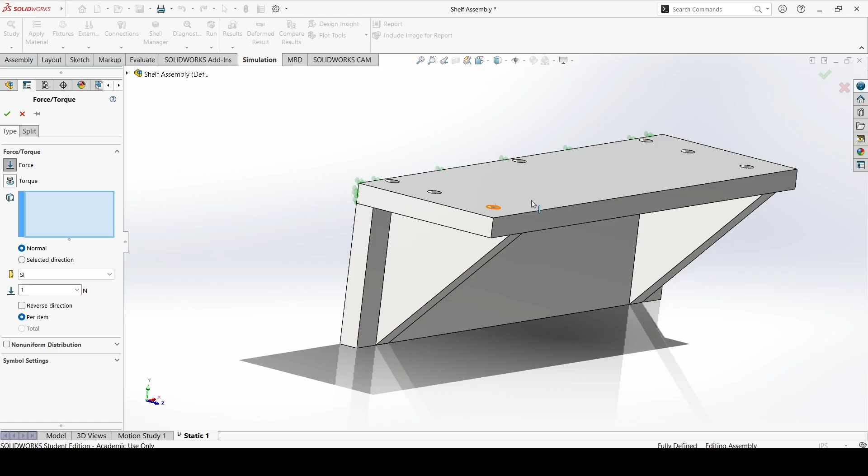I actually would like to add a force to this. So a force, we can just select on this, and we want a uniform force like this. And we can have English units too. And I'm not sure how much weight I'm going to put on this, but let's say I'm going to step on this thing. And our units are English pound system or IPS, whatever, and pound force.

So essentially, I'm going to want to make, let's just make this 120 because I am fat. And that's pounds force. And so we know it's a pound force. I'm not really sure about the distribution, stuff like that, but it's fine. We'll put the check mark on that.

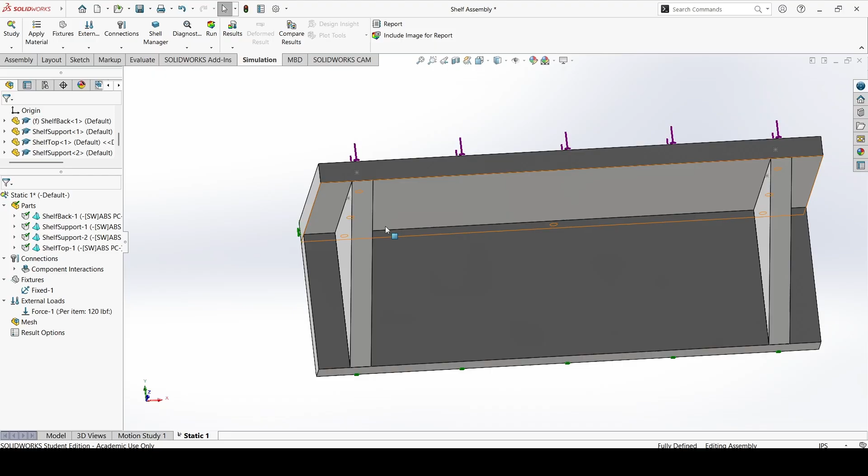And now there's a lot of different other loads that you can add on, like a torque. You can put temperature stuff, because temperature affects the load on a piece too. There's also connections, and there's like pins, there's bolts, there's edge welds. So if this was technically a metal piece and I welded that, you could technically put that.

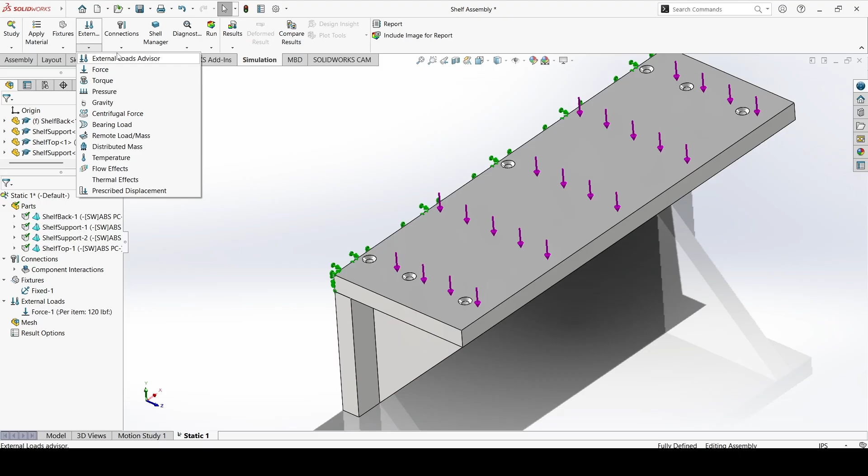But real quick, I'm gonna add bolts or I guess pins. I don't know which one matters. Oh, it looks like it does matter. So countersunk screw and nominal shank diameter. There's a whole bunch of other stuff you can add to this. I'm going to just add a pin. It's easy enough. There's just so much stuff you can do. But in fact, I'm just going to act like I'm not going to add any of those for right now. I want to show you what everything looks like.

So usually you want to create a mesh and you can set your mesh density. You can also get super deep into it. But right now we're just going to do mesh density. We'll go about in the middle. That's how it's usually set. We'll hit the check mark. It meshes everything. So as you can see around the holes, it's like, oh, what's going to happen here? And it goes from there.

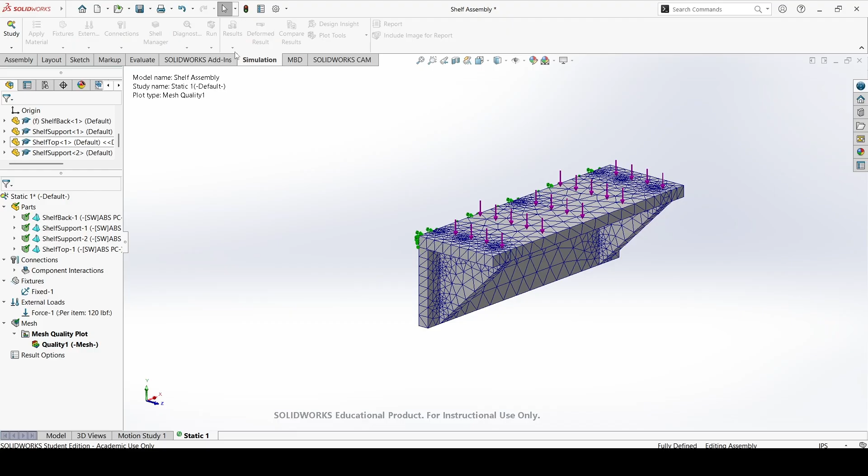So now that we have all of our forces and fixtures defined, I'm going to select run. What it'll do, it'll solve it. And how fast depends on your computer. And as you can see, it looks pretty warped. But this is von Mises stress. You actually want displacement. And so the further we look at the displacement, the easier it is to realize

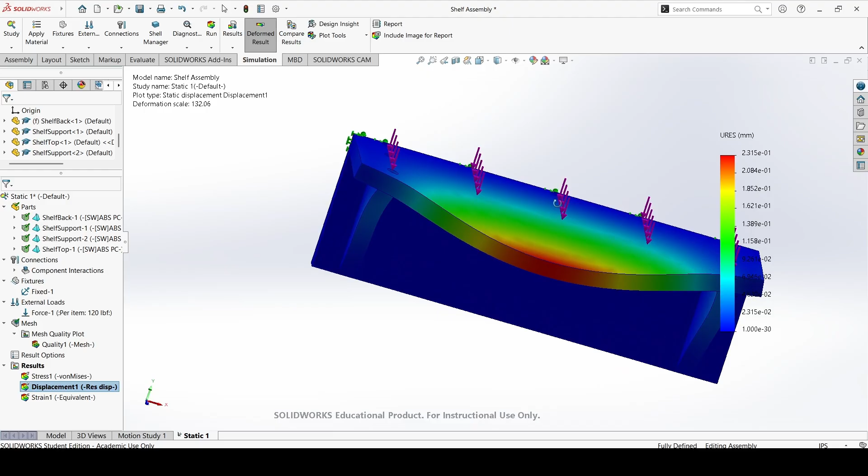that our scale up here is 2.315 times 10 to the negative 1 millimeters. So essentially, it's moving 0.2 of a millimeter. That's how much this spot right there is deflecting, assuming this back surface is fully fixed, and so is that. And it even shows that this is kind of bending a little bit, but it's very not noticeable.

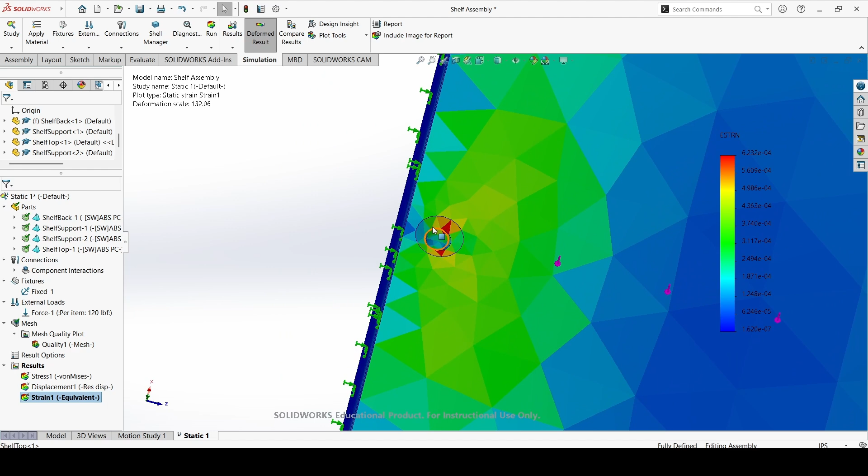And so there's a lot of just different graphs you can put on this. So there's a lot of strain put specifically on this bolt right there. So that might be something you look into for optimizing later on. As you can see, there's also a lot of strain here, there, a lot everywhere. So interpreting these results is another thing. A lot of times it's difficult to look at this and be like, oh, what is going on? And I think that's completely normal.

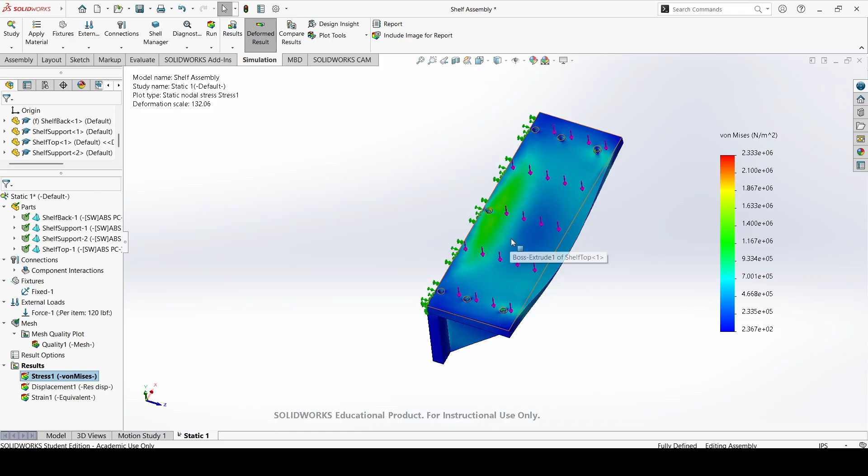But yeah, that's how you basically make a shelf. And it would be more accurate if I added pin supports here or screw supports if I knew actual values of what the screw was, like different shank nominal diameters and how tight the fit would be or how much torque I torqued them specifically down to.

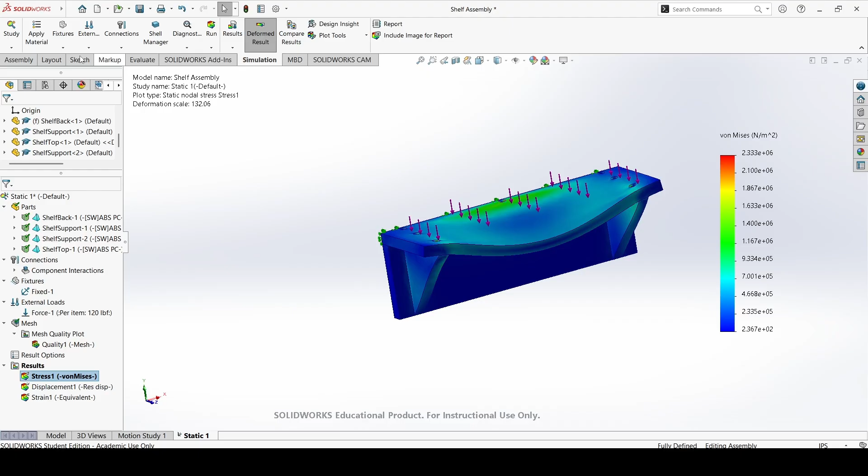And also keep in mind that though this is made of ABS, it's assuming this ABS is completely solid, like cast ABS essentially. This was not made with a 3D printer. I'm fairly certain it probably would hold you, but I think it might deform a little bit more. So yeah, after that, if you'd like, you can just save everything and it will save the statics and stuff with it. So yeah.